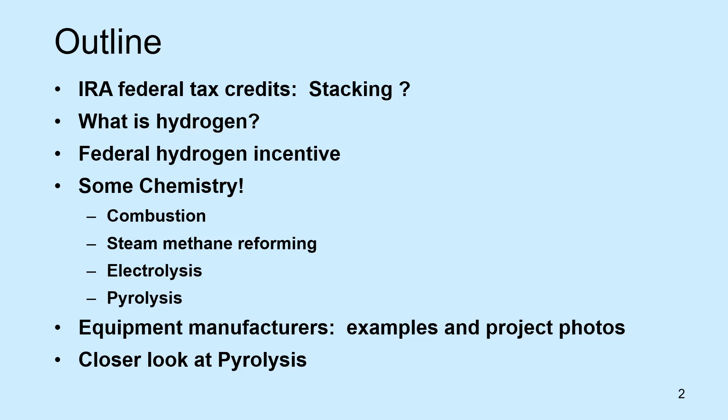And I've been getting really excited about pyrolysis. Methane pyrolysis basically decomposes methane, CH4, into hydrogen and carbon black, solid carbon black. So there are some definite advantages on the energy and logistics side for that.

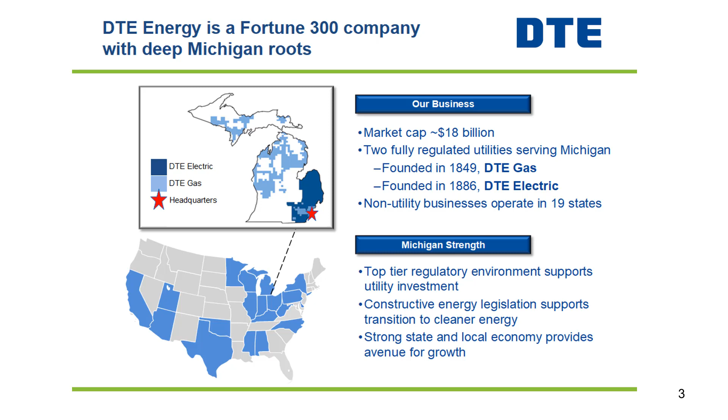So I work with DTE. I'm on the gas side of the business. DTE was formerly Detroit Edison years ago. DTE Electric handles the electricity for Michigan and the southeast side. They merged, or actually DTE purchased Michigan Consolidated quite a few years ago, and that territory was all across the state. About half of our volume is in the southeast, and the other half is out in God's country up north in the beautiful state of Michigan - Upper Peninsula, Grand Rapids, Petoskey, Alpena, Traverse City - a beautiful area.

So I'm kind of the engineering nerd for this gas sales and marketing group. I support customers and do studies on new technologies for decarbonization to save money, and also some educational stuff in-house, and that's kind of where this comes from.

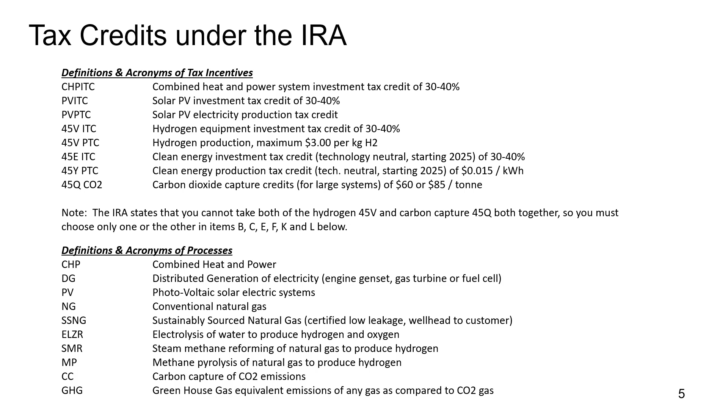So don't get too tied up in this - you can freeze frame and look at it in more detail. There could be a whole presentation on the tax credits, but I'm going to show you the combination potential of different tax credits on a project like solar and power generation, or solar and hydrogen production. There's some you can do and some you cannot. So these are just the acronyms or tags I use to show some potential combinations.

For instance, solar photovoltaic, solar electric panels - you can put a solar array in, make hydrogen with an electrolyzer, a water electrolyzer. So you get an investment tax credit or production tax credit on the solar, and the same with the hydrogen gear. The hydrogen equipment can get an investment tax credit of 30-40%, or a production tax credit of up to $3 per kilogram of hydrogen. Quite lucrative and quite helpful.

You cannot take natural gas - this is sustainably sourced natural gas, or certified low leakage natural gas with less methane leakage out in the production side, the transportation side. You cannot, for instance, do pyrolysis or steam methane reforming and take the hydrogen credit and the carbon credit where you capture the carbon out of the output. You cannot take both of those together - it's specifically disallowed in the legislation.

You could also produce solar electricity from an incentivized PV array, a big PV array. It's all very scalable - I'll show you some diagrams of how that looks a little later on. And then you can also get the tax credit on the hydrogen, it's 45V. Then you can also put in a power producing cogen unit, a CHP, an engine or turbine that could use that hydrogen as a fuel for a very low carbon electrical output with the resiliency of the stored hydrogen. And you can get credits for all three of those in one project.

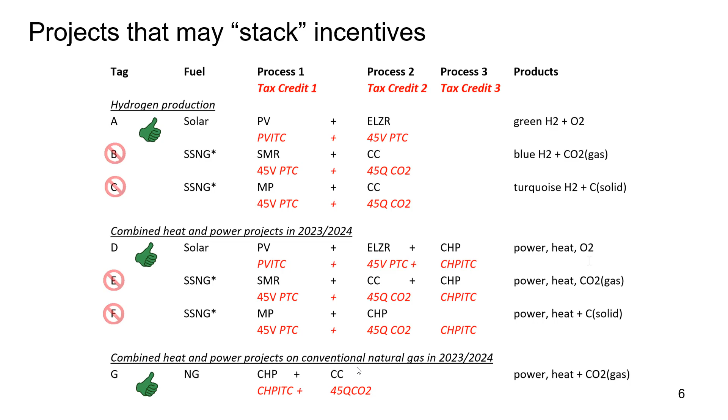Very helpful. You can put in the cogeneration system and capture the carbon off the back end. If it's large, there's a threshold you have to achieve in size to do that. Those two credits can be very lucrative together.

And then in 2025, we switched away from this cogeneration incentive - that's going to go away, and then you have to have a clean electric project of any kind, technology agnostic, but it has to have zero carbon. So things like this: wind to produce solar, or wind or solar to produce electricity for hydrogen production, and then a distributed generation, an engine generator or a turbine. These all three can be taken together, and that's good for another 10 years, I believe.

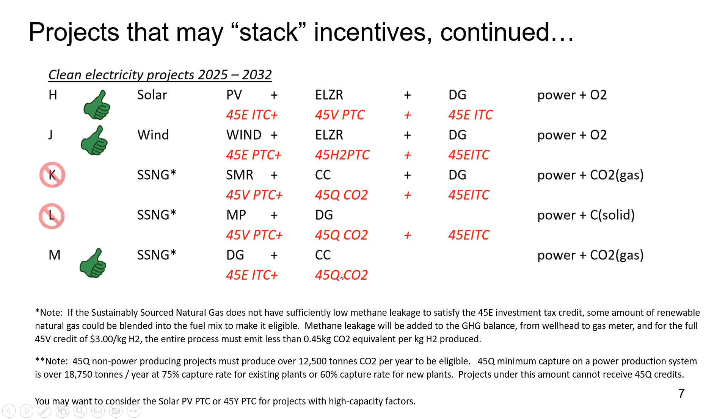And down here, distributed generation, where you have an engine generator off of sustainably sourced natural gas with carbon capture that'll survive in the future. This could be a whole presentation.

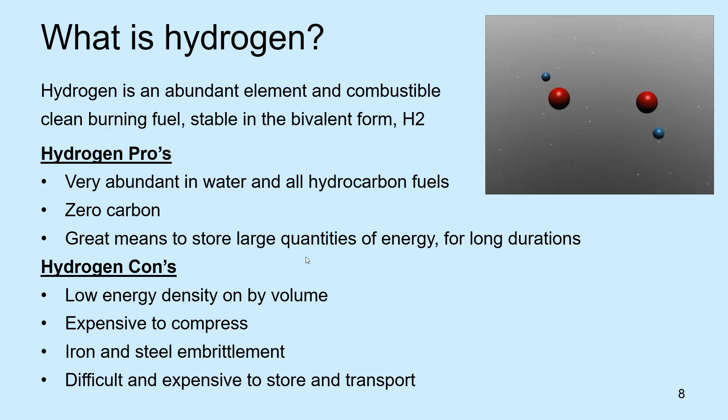So it's complicated, but I'm a big fan of distributed hydrogen. Let's produce it out in the field at the point of use. I'll talk more about that later.

So gray hydrogen, if you use natural gas and use steam methane reforming, that's called gray hydrogen. You let the CO2 escape. It's fairly CO2 intensive, but that CO2 could be captured. There's these amine processes or other carbon capture processes that are available today. It's nothing in the future, it's available today, but it costs more money.

And then you scrub out the CO2, similar to a scrubber, like a NOx scrubber. If you've seen a urea-based scrubber for an engine system that reduces the NOx, it's going to be fairly similar, but now we're getting rid of the CO2, and that's blue hydrogen.

Green hydrogen, I'll skip over to that. That's renewable energy, renewable wind or solar into an electrolyzer to make hydrogen from water. That's green. Pink is the same thing, but maybe nuclear power. And turquoise is this pyrolysis, where you thermally decompose methane, natural gas, into solid carbon and no CO2, no gas, just a solid carbon, and then the hydrogen.

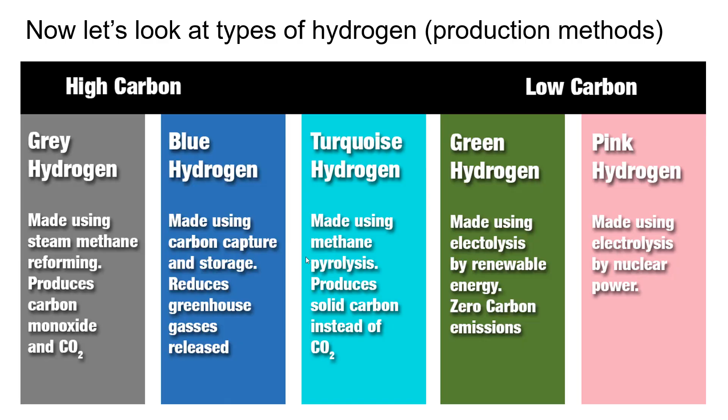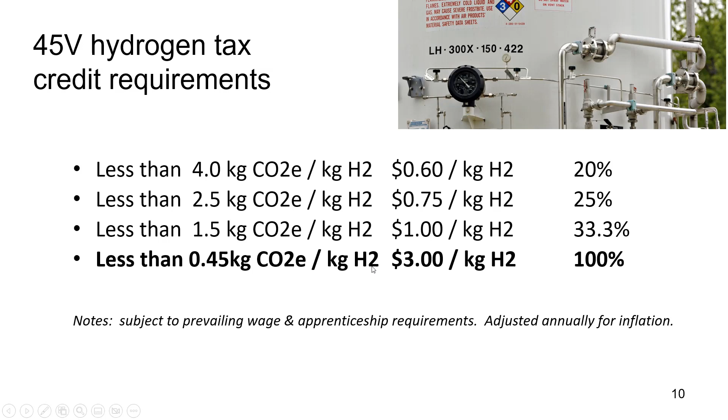So the tax credit, it's really the $3 here. That's the holy grail, quite lucrative, for the green hydrogen. Although I believe we can get there with pyrolysis as well, and I'll talk to that in a moment. If you missed that target, the target is 0.45 kilograms of CO2 or greenhouse gas equivalent per hydrogen kilogram produced. If you don't make that, you've dropped down to $1, and there's some other threshold as well.

So the methane leakage in the whole food chain, using this Argonne National Lab GREET model - in the bill they call out a methodology that'll be used to calculate leakage from the wellhead to the pipeline, all throughout, wells to wheels analysis. But we're talking about from the wellhead to your project site. And the methane leakage is really important. We have to get low leakage product for these things to get to the $3.

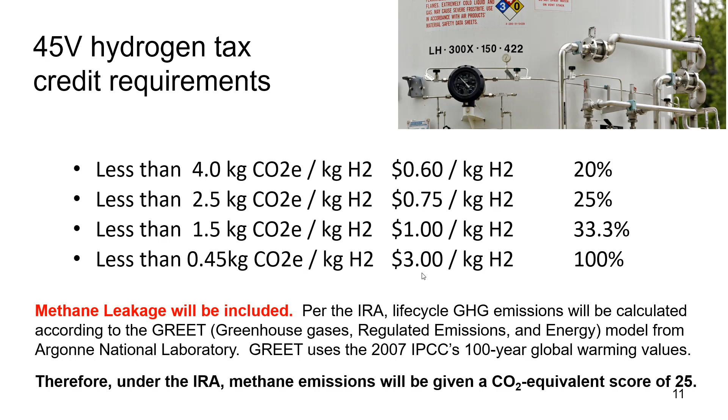There are certified, sustainably sourced, or responsibly sourced products out there that are third-party verified of low leakage. I believe we can get to this $3 credit if we use those products. But we have to stop the leaks. In the previous bill, the infrastructure bill, there are some carrots and sticks in there that were forcing the gas industry to really get more aggressive with stopping leaks. We have to stop methane leaks. That's a requirement. With or without all this I'm talking about, we have to get rid of the methane leaks.

So looking at 1 MCF, if you're paying a natural gas bill, you're either going to be charged a CCF, 100 cubic feet, or 1,000 cubic feet, which is an MCF. When you combust an MCF, it's about 56, roughly 55.8 kilograms of CO2. And if you pyrolyze it, you get about 5 kilograms of hydrogen. That's just the decomposition of the CH4. There's four hydrogen molecules to make about 5 kilograms per MCF.

So using the carbon sequestration section 45Q, there's two provisions. If you sell the CO2, you get $60 a ton - that's a metric ton, 1,000 kilograms - or $85 if you somehow sequester it. There's a cost and some unknowns on that sequestration, so I don't have the knowledge to speak to that.

These are the ranges here: $3 or $4 per MCF of value on the carbon capture side of the business. If you make hydrogen and get the $1 credit but don't quite get clean enough, you can get $5 per MCF, which is much more lucrative.

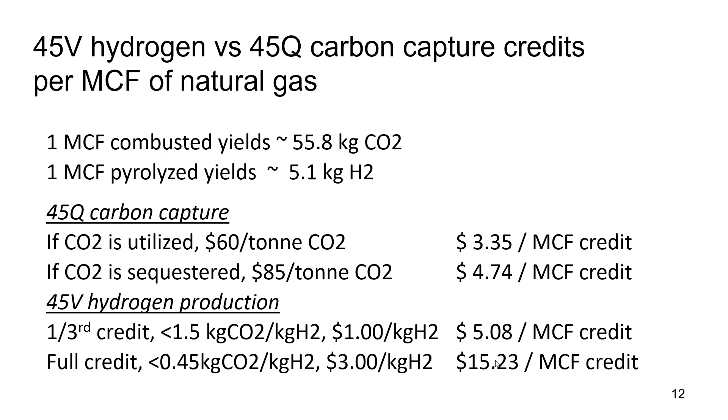And if you hit the $3 threshold, that's even better, about $15 per MCF of gas purchased. So imagine buying gas at $3 or $4, then having a project that creates hydrogen, which is a product, and carbon black, which could also be sold, plus $15 in a federal incentive that lasts for 10 years.

This hydrogen action plan, relatively new data from 2023, looks at the carbon intensity produced from steam methane reforming. The first column is steam methane reforming with no carbon capture—just letting the gas go.

The majority of it is stack emissions, but there are also natural gas emissions, shown in yellow, from the pipeline and wellhead. All that is fairly significant. Then there's the grid, using a standard average carbon intensity for electricity—that's what builds up this number.

With carbon capture, you can remove some of that, but you're not going to get to where we need to be. This one is still at 4.6 kilograms of CO2 equivalent per kilogram of hydrogen.

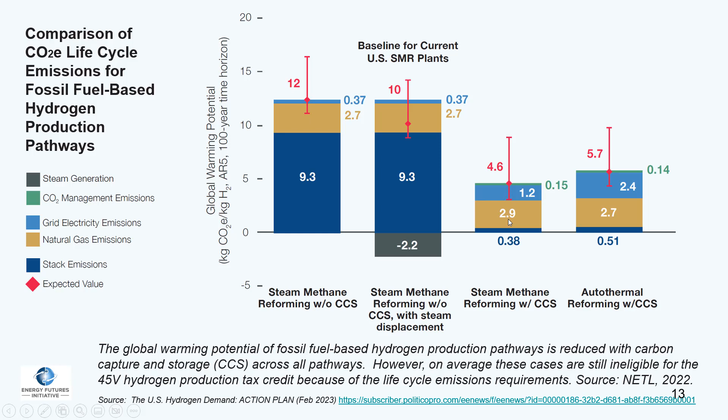But the methane leakage—if you could get a really sustainably sourced product and use renewable electricity—this 1.2 and 2.9 can be brought down to next to zero. That would be solar or wind electricity, and potentially you could blend in a little renewable natural gas. So I see it's within reach, and some companies are saying they can do it.

To further this discussion, feel free to click on this link. There's an article from Recharge News Online that talks through the math and equation to get to 0.45 kilograms of greenhouse gas under the GREET model. So it is doable—it is doable.

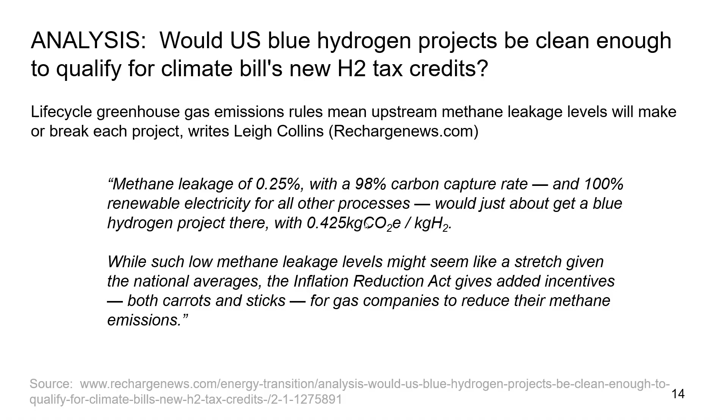Keep moving along—hydrogen production today. This EPA data, I believe, came from the same document I referenced earlier. This is where it's coming from today: steam methane reforming without carbon capture is predominantly the source of all hydrogen.

Going to petroleum, ammonia, methanol. The Haber-Bosch process makes ammonia, NH3, which has enabled humankind to exist on this planet the way we have. I believe it's the most prolific, most important chemical process to mankind.

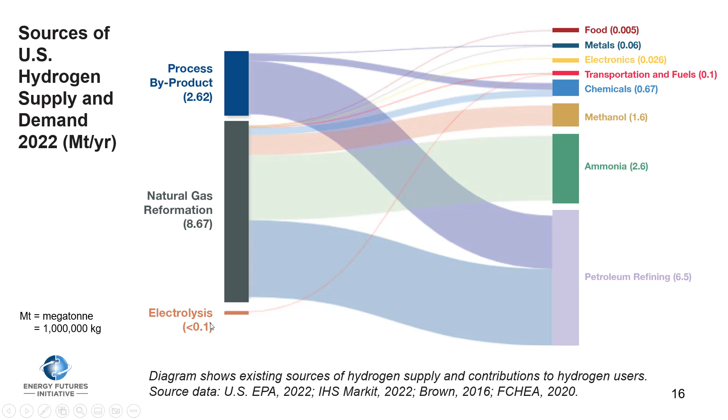It takes hydrogen, so that hydrogen typically comes from natural gas—CH4 into hydrogen into NH3, with nitrogen from the air. Sometimes hydrogen is produced from an industrial process and used on site. But electrolysis is quite expensive and new—that's green hydrogen. It's up and coming, but expensive, and will take time to grow in the marketplace.

This is where you'll see hydrogen being produced and utilized today. There are hydrogen pipelines in the Gulf—this is the oil and gas industry—and some spots around the country.

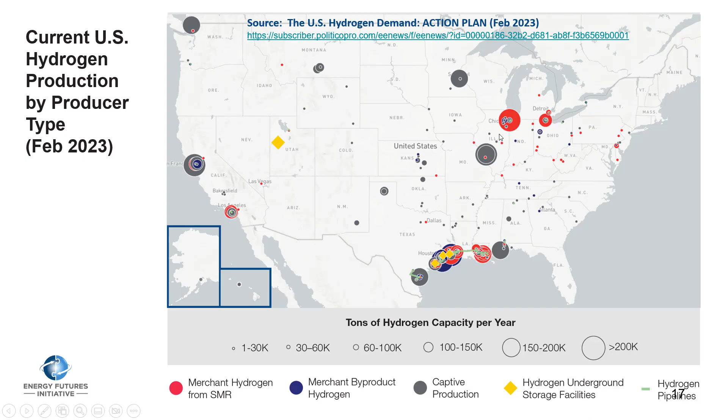But let's talk about some chemistry. Natural gas can be burned in your boiler, furnace, or process—that's what we're all used to. Then there's steam methane reforming, which we saw is the predominant source of hydrogen.

I'll show you that, and then electrolysis. My original thesis for this presentation was to compare reforming, SMR—steam methane reforming—with electrolysis.

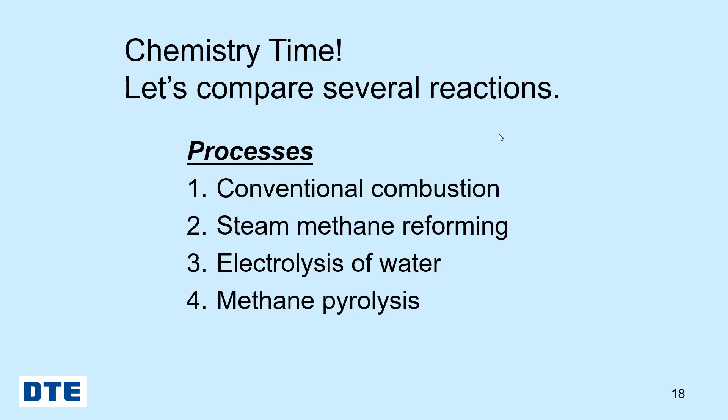1 MCF is about 20 kilograms of mass, 20 kilograms of natural gas. I'm going to assume it's CH4.

When you burn it, you get oxygen in the air, and it produces heat—we're looking for heat, that's fuel. It produces a fair bit of CO2 and a lot of water vapor. Carbon dioxide is about 75% oxygen.

So if you're going to capture CO2 and then compress it, liquefy it, store it, pipe it, sequester it, it's approximately 25% carbon—the rest is all oxygen, which is coming along for the ride. That's a lot of logistical nightmare if we're going to capture a substantial quantity of our emissions.

SMR, steam methane reforming with water gas shift—actually it's the reforming process, and they inject some steam. So there's some energy and some CO2 emissions in the steam boiler process.

And then the methane pyrolysis - you're basically cooking it. There's different methods: catalyst methods, fluidized beds, bubble columns with liquid metal or molten salt, plasma, microwave, and other forms of plasma to basically heat and decompose the methane directly into solid carbon.

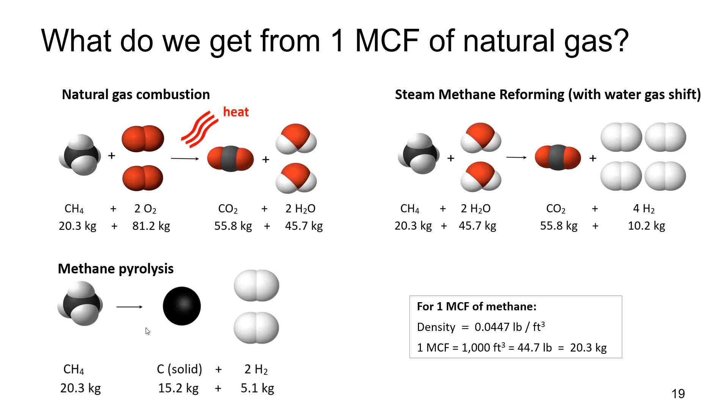I'll show you some pretty cool examples of that - some cartoons that kind of show these processes.

And your boiler is going to burn methane and combust it with air. Air is like 20-some% oxygen, and the rest is nitrogen and other small amounts. So that produces the CO2 and water.

Steam methane reforming, I'm not going to dwell upon this. I don't want to take too long, but the exciting part to me, I'll talk more in a moment about this

solid carbon, which has a value. There's some potentially valuable components in there, like fullerenes or nanotubes or graphene, that might add value to the whole process. If not, it could be sold in bulk to tire manufacturers, maybe processed into biochar for agricultural uses. There's a lot of uses of carbon black, but if we start using this pyrolysis a lot, there could be a deluge of that on the market.

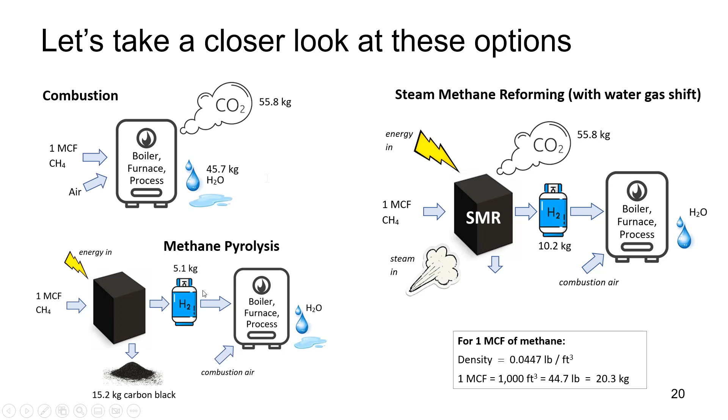How does it compare to electrolysis? Electrolysis is much more energy intensive. Water molecules are not a fuel. CH4, methane, natural gas is a fuel - it's got a lot of energy waiting to be burned or utilized. Water is not a fuel, it's a happy little molecule, it doesn't want to change, it's very stable. So you have to forcibly split it apart, and it takes 7 or 8 times the amount of energy to activate that separation of hydrogen and oxygen.

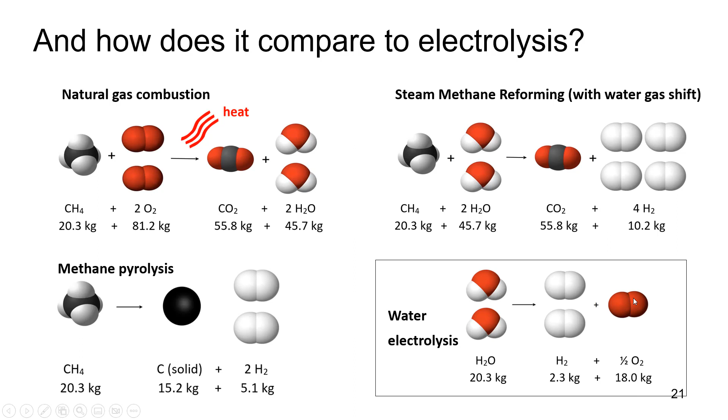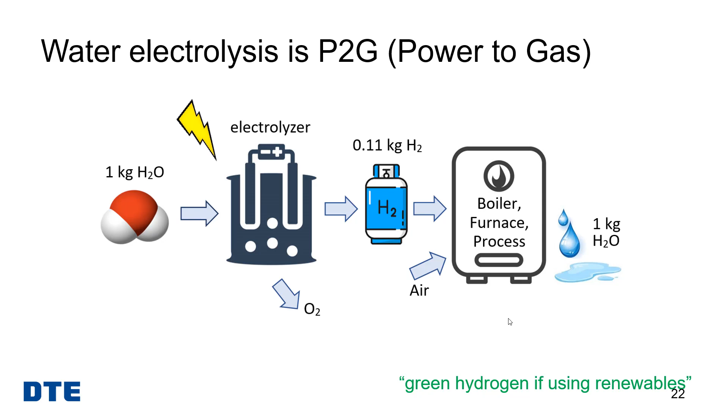So I think you're going to see a lot of it. That's where that $3 credit was really designed for green hydrogen. This is the green hydrogen, and you're taking a lot of electricity - it has to be from solar or wind. If it's from nuclear, that's great too, I think nuclear has a place in our future, but the grid has a lot of carbon in it. So if you're just pulling electricity off the grid, this may not be the cleanest, greenest process.

But a utility pilot project at a customer site might look something like this. You got the solar, and you could make DC electricity go straight to the electrolyzer, but that would be a custom system that doesn't exist in the marketplace today. So it'll probably be a conventional inverter to the grid interactive type system, and then we'll pull AC power to the electrolyzer.

It does take a fair bit of water. So if you're going to produce massive amounts of hydrogen, you're going to need some pretty serious water supply. So doing it in the desert might be a challenge.

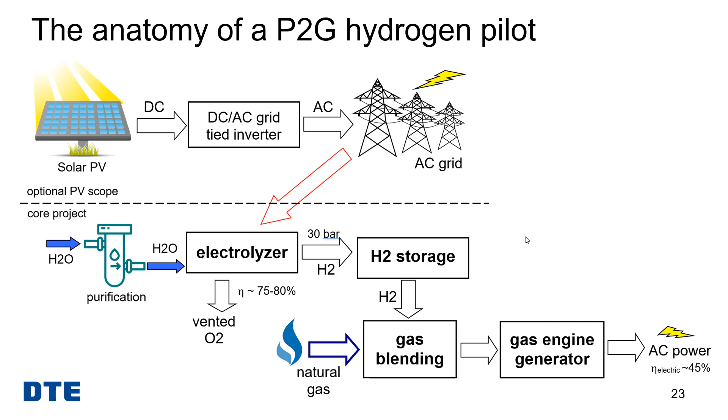And then it could be blended with natural gas, or it could go into an engine generator. This is the type of pilot project that I've been preparing to shop around to see if any customers would like to test it out. We could do it at one of the DTE sites as well.

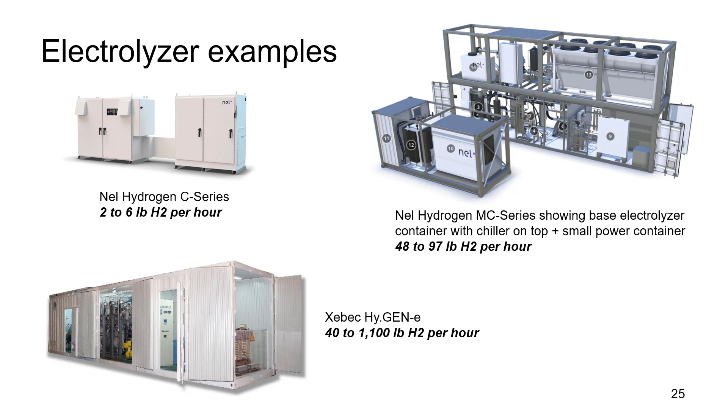You can get really small units to really big containerized large units that produce a lot of hydrogen, and they can be stacked together in an array in a big plant. So there's great ability to scale both the solar photovoltaic side, one panel to one million panels - it's scalable on the hydrogen and the power generation side. Wind power is even cheaper, and that's an option, putting these things out near wind farms. So you're basically making a storage of energy - you're storing it in the hydrogen as a chemical fuel.

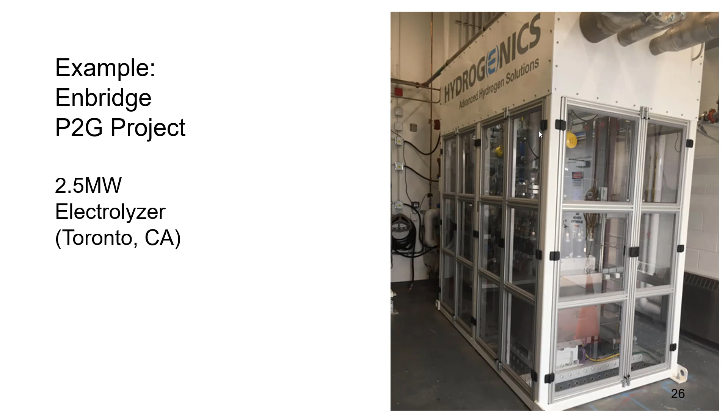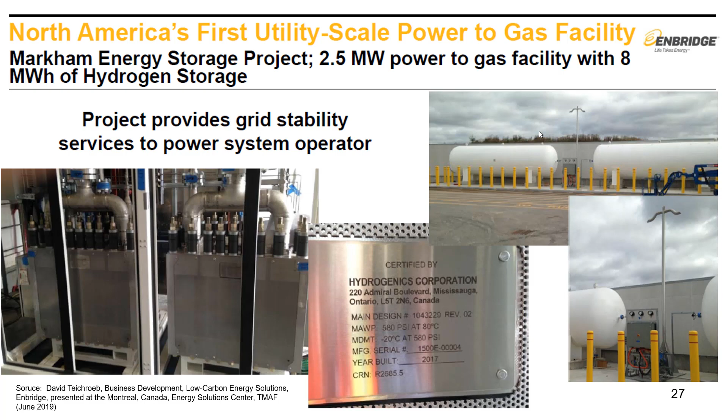In Toronto, Enbridge Gas has put a cool little project in there. I believe they started blending hydrogen into the grid to have a test pilot installation of a hydrogen blending opportunity.

Let's talk a bit about pyrolysis. I've got two video clips, each about two minutes, to get you up to speed on what this might look like.

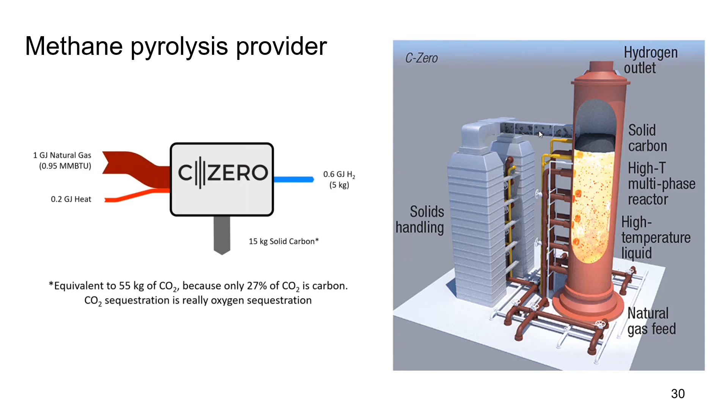This C-Zero technology is using a molten salt bubble column. The graphic on the side here is a potential very large commercial scale facility. They're saying the CO2 is 27% carbon, the rest is oxygen. So why make CO2 gas when you can do it this way? Let's take a look.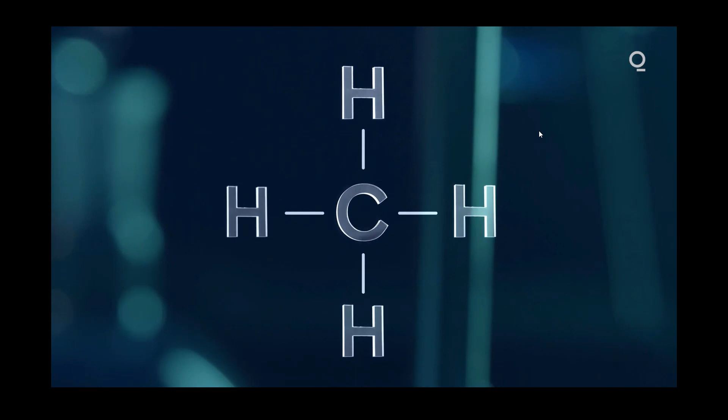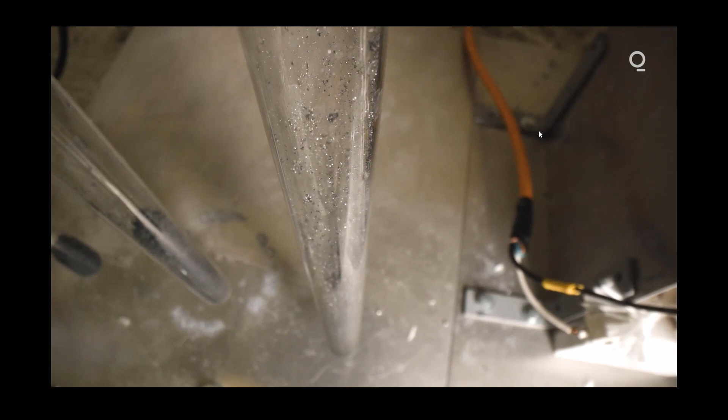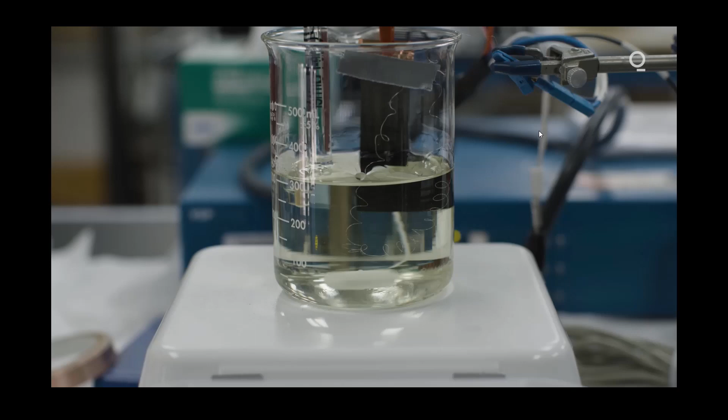We describe what we're doing at C0 as turquoise hydrogen, because it's a combination of both blue and green in that it's low cost and low emission. C0 has developed a technology for removing the carbon in natural gas. Natural gas is a hydrocarbon, made out of hydrogen and carbon, and what we do is remove the carbon. We pull out the solid carbon from the hydrogen we produce, and there are no direct CO2 emissions because anything that would have been CO2 is instead solid carbon. If you want to get hydrogen from water, it takes 7.5 times as much energy to pull hydrogen off of oxygen by splitting water as it does to pull hydrogen off of carbon through our process.

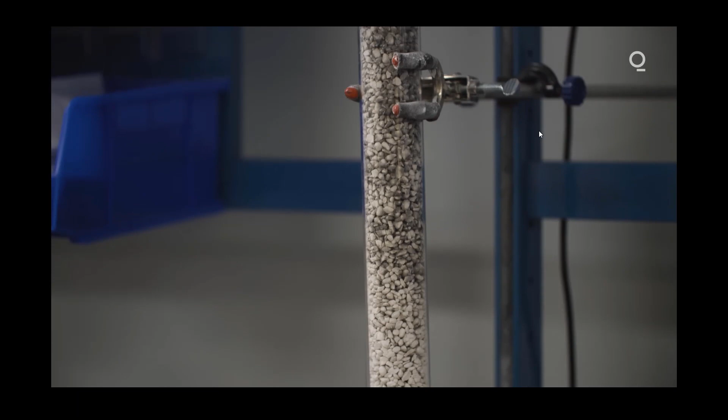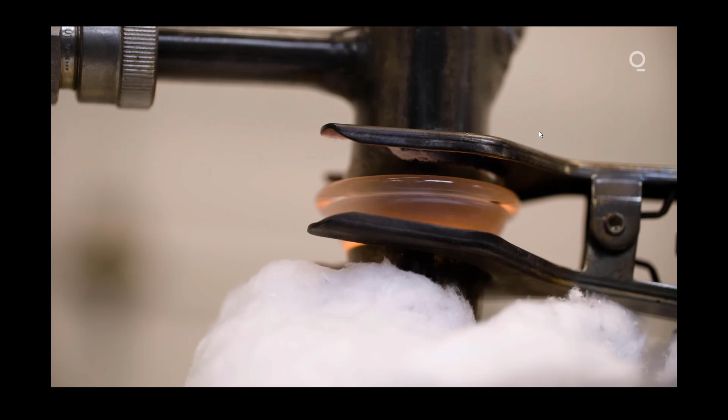The way C0 achieves it is using molten salts. It has a big chamber full of salt heated to a very high temperature. This is an example of one of our laboratory scale reactors, around 1,000 degrees and slightly above, a molten media column. It bubbles natural gas through that chamber, leaving behind carbon in its elemental form, and hydrogen is a gas that can be trapped and sold.

If we're successful, we're producing piles of black carbon that ultimately gets sequestered back into the ground. You can think of it almost as pre-combustion carbon capture. Rather than ending up with CO2 that you have to concentrate, compress, put into a pipeline and inject underground, we pull it out ahead of time as a solid that's much denser, and you can move it around with conventional solids handling equipment and dispose of it.

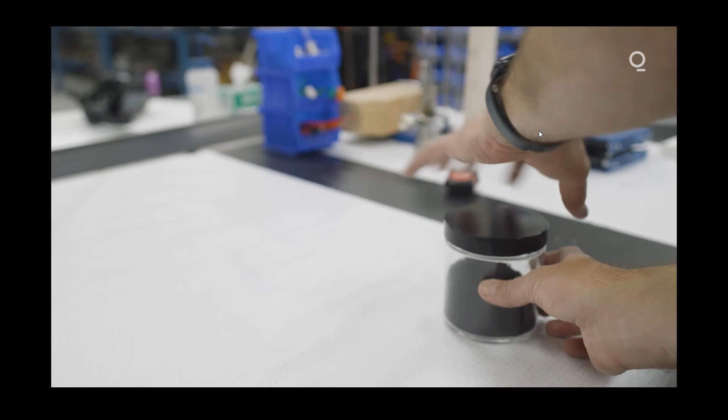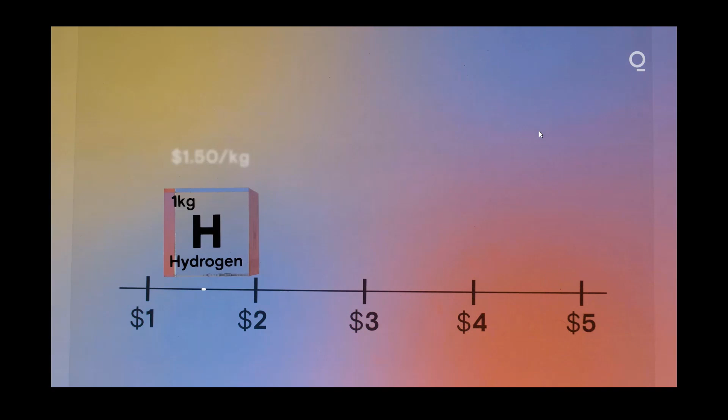Just like green hydrogen, the success of turquoise hydrogen will ultimately come down to cost. $1.50 per kilogram of hydrogen is our target for doing this at very large scale. If you can be $2 a kilogram or less with very low to zero CO2 emissions, that's a game changer.

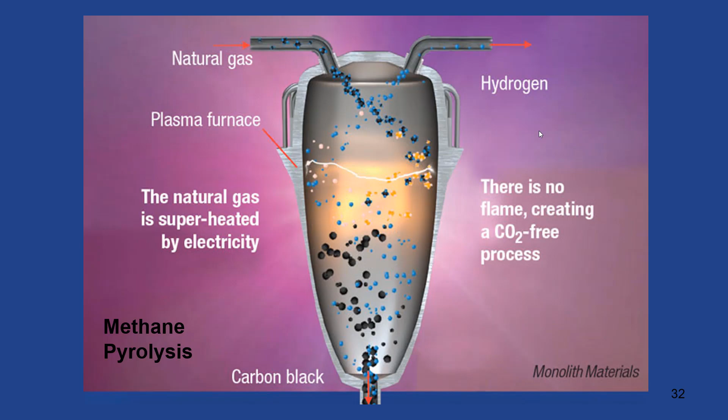Monolith is another more established pyrolysis company using a plasma system, and they're installing a very large site out in Nebraska for ammonia production. I believe this is operational and they're expanding it. It's the Olive Creek project out in Nebraska.

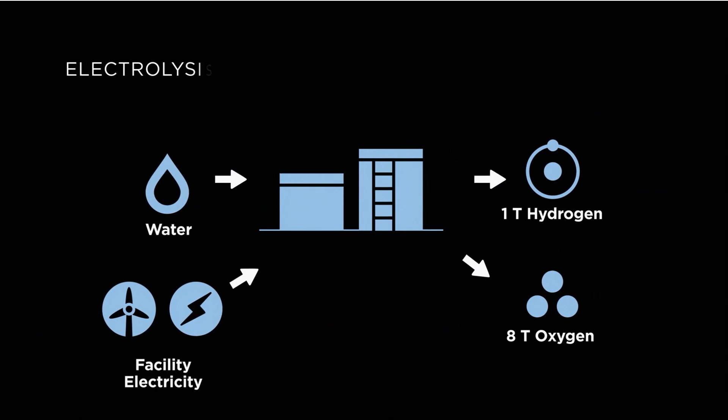The key to meeting the 2050 decarbonization goal is clean hydrogen. This solution provides the high energy needs for a wide array of industries and categories. Traditionally, there have been two methods for producing hydrogen. The first, steam methane reforming or SMR, although affordable, releases 11 tons of CO2 into the atmosphere for every 1 ton of hydrogen produced. The second method, electrolysis, is a low-emission solution but not as affordable and requires 7 times the electricity than the new third method for producing hydrogen.

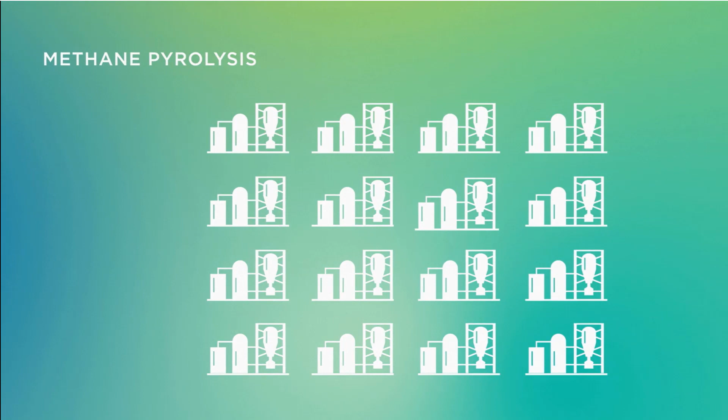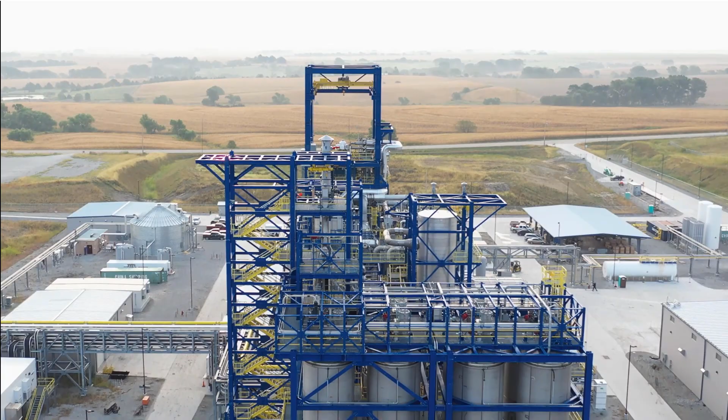This method, methane pyrolysis, has been perfected and made commercially viable and scalable by Monolith, and is the only low-cost and low-emission solution to create carbon-free hydrogen. Using 100% renewable electricity, methane pyrolysis cracks the natural gas molecule using heat, not combustion, so there is no release of CO2. And in the very near future, through the use of renewable biogas, it will not simply be carbon zero, but carbon negative. 2050 is approaching.

Without an affordable and at-scale carbon-free hydrogen solution, the world will not meet its emission goals, which is why clean hydrogen, produced by Monolith, will lead the way to the energy transition.

Monolith does believe they can get to the 0.45 mark. This is from their literature, with their process here in the middle, saying that they can reach that $3 credit threshold. It's pretty cool. And electrolysis at zero. On the left here, the columns are steam methane reforming with and without carbon capture.

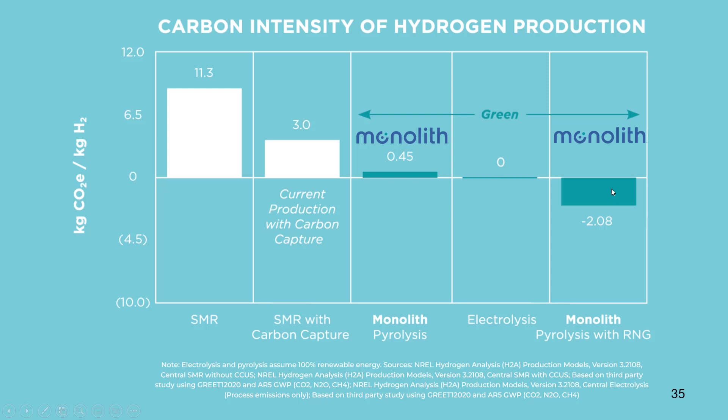But exciting, and I think as an engineer this is very true: if you use renewable natural gas from manure or biosources, some biogenic natural gas, you could actually make this system a carbon negative opportunity to produce carbon credits for someone else. That's really exciting. This is not greenwashing. This is a true opportunity.

So distributed hydrogen, I think, has some major benefits. The difficulty of compressing and transporting, God forbid liquefying hydrogen, makes it really challenging to move around. It's much better to make use of this multi-trillion-dollar natural gas infrastructure we've developed over many decades that is very reliable. Resiliency, and looking at all these power outages across the country, makes you wonder if electrification is really going to ever have the resiliency and safety that we need. I think some combination of these things might require us to do some distributed hydrogen technologies.

Anyway, take a look at these bullet points. Steam methane reforming is king right now, but I think pyrolysis, as these companies develop further business models, might just be the way to go, because it produces solid carbon that's immediately sequestered. Once you pull that carbon out in your process, there's no worry about it escaping back to the atmosphere. It's sequestered right then and there. That's really exciting. It's a really good tool to decarbonize our natural gas industry.

But one thing I should mention is that it's going to take approximately double the gas supply to the customer. So imagine, as a gas utility, if you were serving a boiler or an engine, that heating load, that BTU energy requirement - through the pyrolysis process, which is roughly 58% efficient, you're leaving some energy in the carbon, so the carbon is not combusted. There's energy lost there, and there's the activation energy for the process. You're going to have to supply about twice the product, twice the natural gas, to that process.

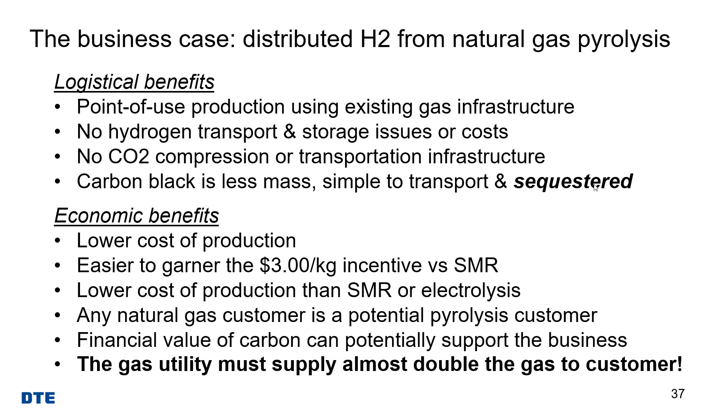But the tax credits pay for it all completely, so it's a lucrative opportunity while you're selling twice the product. That's amazing. For folks that don't want to use natural gas, that might be counterintuitive or not desirable, but for a gas utility, you're sequestering the carbon, so you're decarbonizing your customer site and selling more product. That's just an amazing opportunity.

I did some numbers here looking at 10-cent electricity. I'm using a number from a friend of mine who's a chemist that has a pyrolysis process of a fairly low 3.8 kilowatt hours per MCF processed. That may be too low, so even if it's more than that, I think we can still make money on the process, but there's no value of carbon here. So 10 cents a kilowatt hour for green wind or solar power, and then that amount of electricity.

But the electricity isn't really the driver, it's the natural gas cost. So if you get the $3 credit, maybe blend in a little bit of renewable natural gas, which will increase your price, or get this responsibly and sustainably sourced, certified, low-leakage natural gas - with whatever you need to do to get that 0.45 in your process and your fuel supply, the money involved is quite lucrative. So if natural gas is in the range from $3.50 to $5, you can still get a profit if you have the $1. So if you miss the target, I think there's still an opportunity.

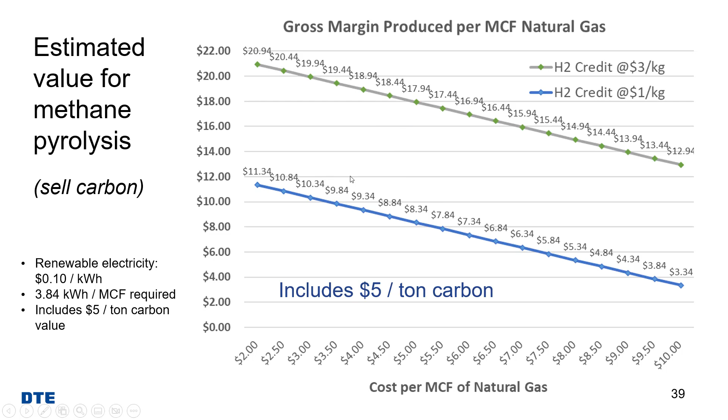If you were to sell the carbon for $5 a ton, just some nominal made-up number, it improves the ROI, and the value chain is a little bit better. The value proposition is a little bit better.

And then once this 45V goes away, I truly think there'll be a carbon tax or some kind of tax-and-dividend or cap-and-trade style thing that will force people to get off carbon. A lot of companies are making commitments to decarbonize today, and they're looking at electric technologies. But if they have a process that needs natural gas, this could be a solution.

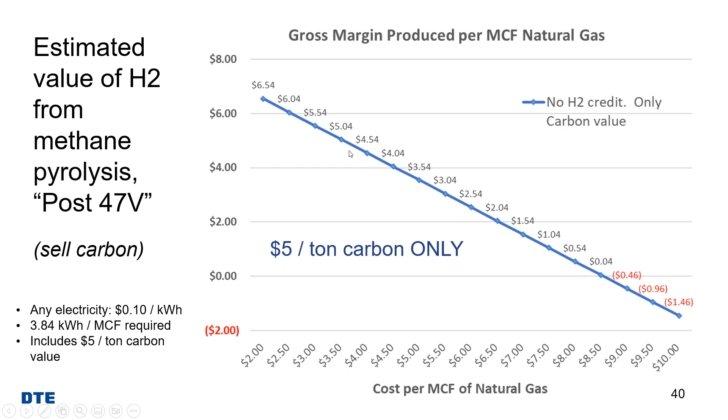So this is just the whole economics based upon the carbon sale of $5 a ton only, and it still makes a good value. So to conclude, SMR is king today - it's the dominant form of hydrogen production. But solar electrolysis is up and coming. It works well, it's very scalable.